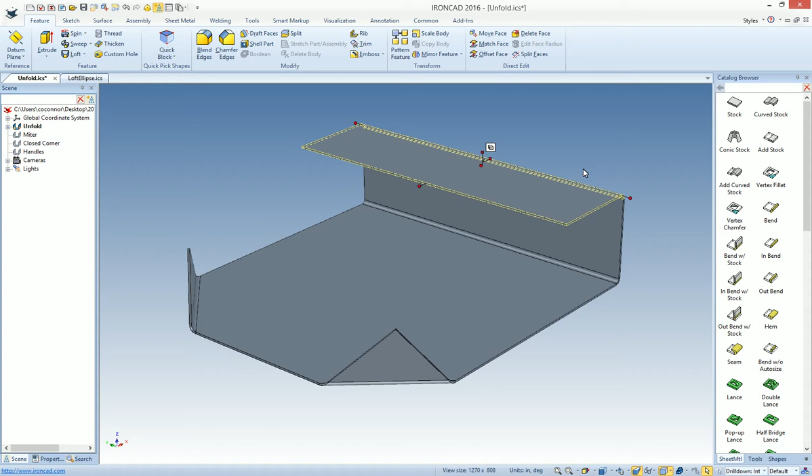This is really what's required us to use things like the cut sheet metal operation. For example, if you wanted to cut this guy, you would typically drop a block out here as a part or some shape, draw your shape, and use the cut sheet metal operation to basically cut that, and it would go through and handle this by feature unfold to give you a result. You couldn't just simply drop a cutout on this guy and expect it to unfold. It would always fail and not give you a result - it would either give you this whole solid piece back on the flat, or fail to unfold.

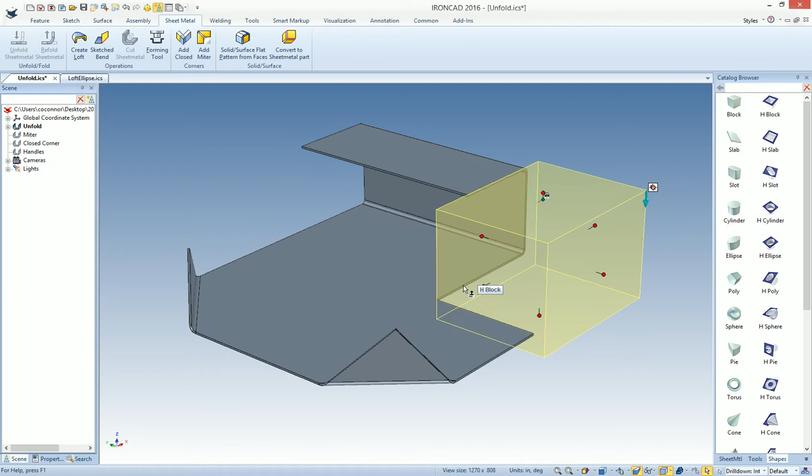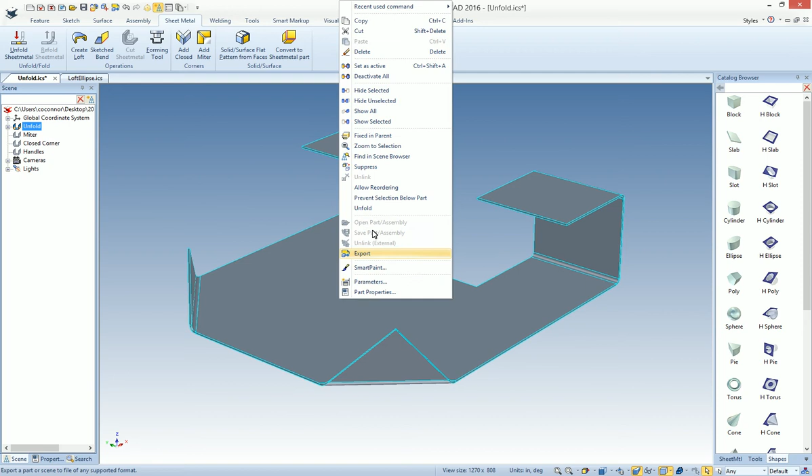It couldn't handle it. We've improved this capability in 2016 PU1 to support a lot of these conditions, and this gives us a whole range of new capabilities. For example, if we wanted to do that same operation - cut through all of this in one shot with just a regular H block inside here - I can now go in and unfold that with our regular unfold command, and it properly handles that. So that's a very, very cool feature.

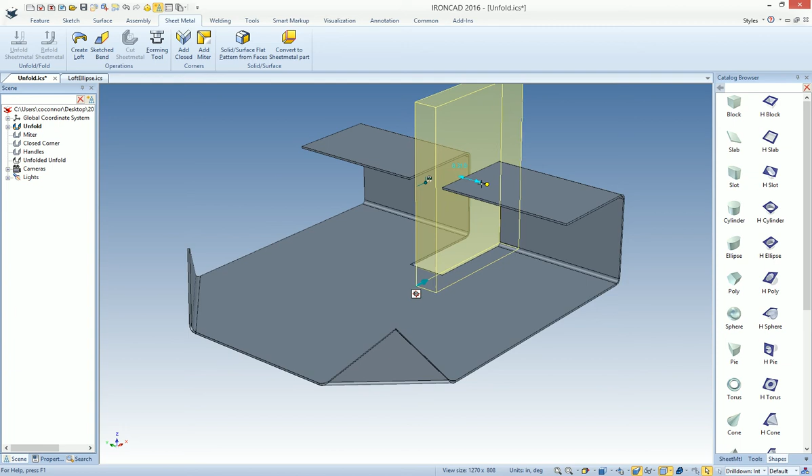It really opens the doors for things like, if you wanted to make this smaller - let me grab that guy and make it a little bit smaller inside here, something like that, and bring it down. You see people make these little support cuts, patterns along here. If you wanted to use the pattern tool, you couldn't really do that before.

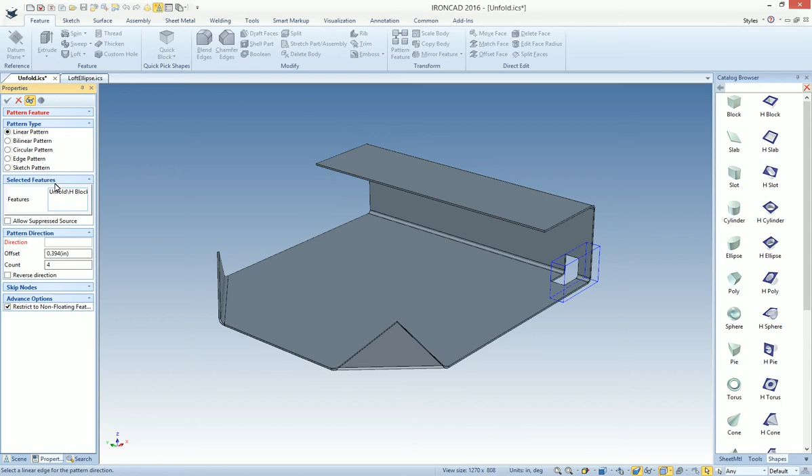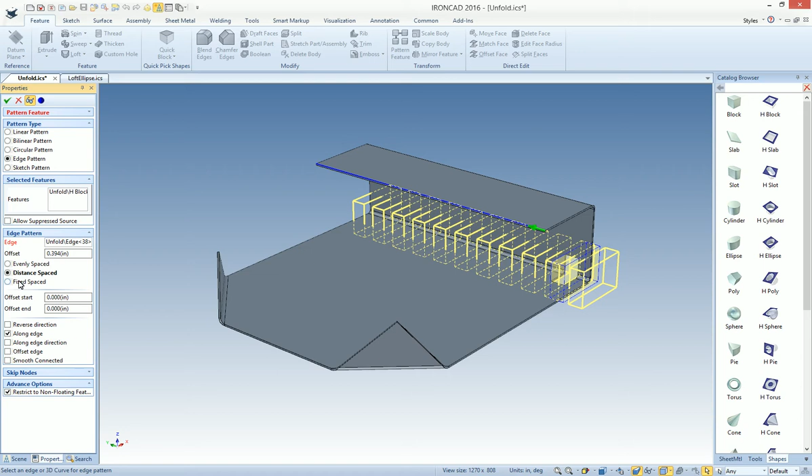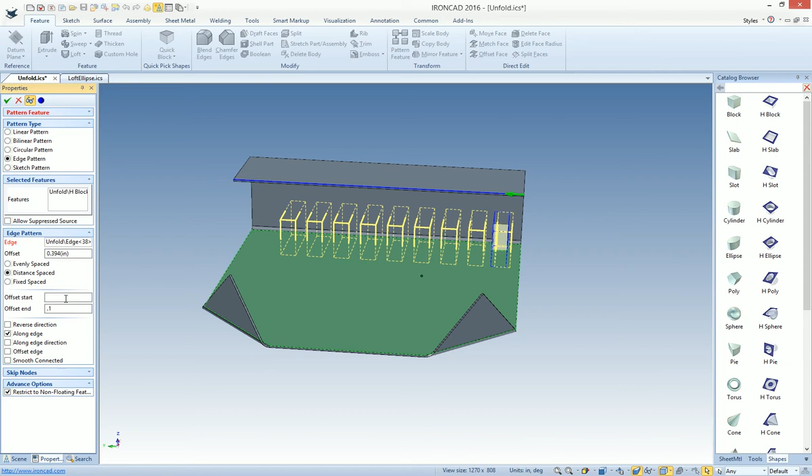Let's see if we can go in here to do a pattern feature. We select our feature, and since we don't have that edge there, we'll just use this edge as our reference. We want to create a linear pattern inside here, or an edge pattern - we can create this edge pattern evenly spaced across that guy, and it goes across the entire edge. We can offset the beginning, maybe 0.25, which gives us a better offset there on the front. And on the end, we'll offset it too - don't need that big of an offset on the end, there we go - evenly spaced along the edge.

Hit OK, now we have that shape inside here. I think I have one pattern over - I should hit that original pattern, but that's okay. Anyways, that gives you the result, but now you can actually unfold that, and it can handle this. Before, it wouldn't handle those types of pattern shapes inside here.

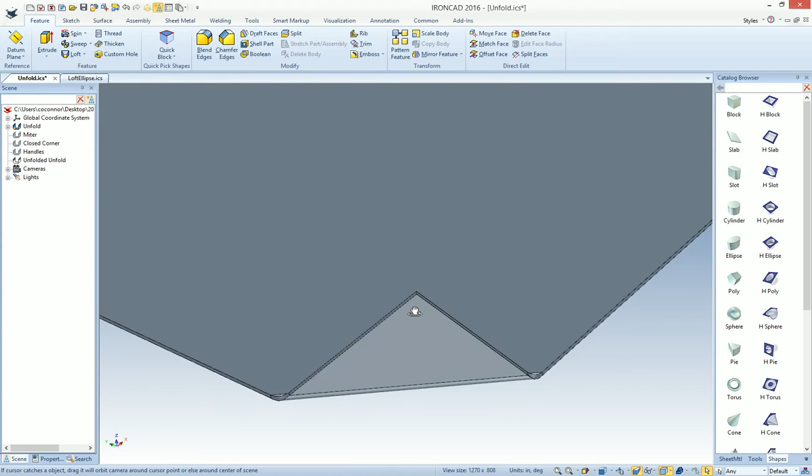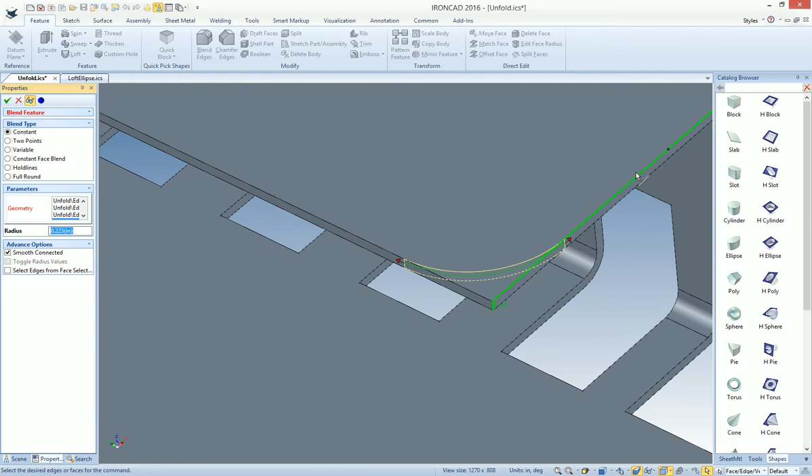This also opens up the doors for a lot of other commands. For example, people always wanted to add blends to these particular edges here - you can now support this capability as well. This is actually a sketched bend in here, and we can add it to these bends up here. You couldn't really add a blend to this edge before, but you can add blends to these edges now, and it'll make sense for it to unfold inside here, so you have that type of blending capability.

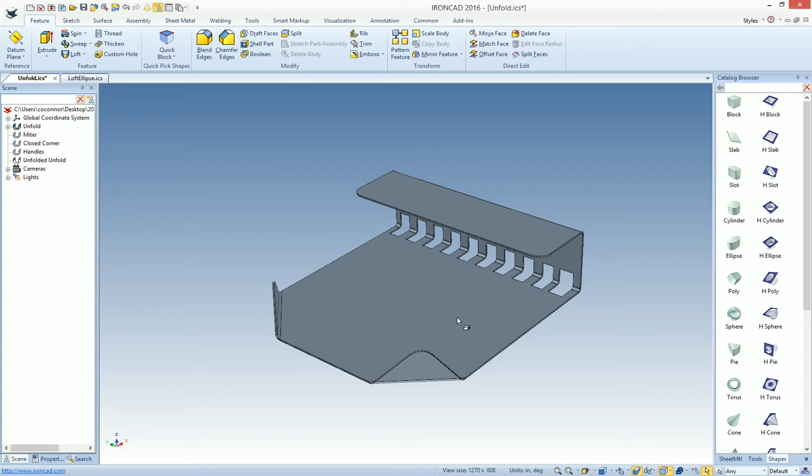We can go unfold it, and it'll handle those - notice the blends will continue to process down. Previously they would fail, giving you an error message saying these blend features can't unfold, but now it is handled. It also opens you up for the command we used to have in 2014, but blocked in 2015 and 16 - the trim command - because it had to use our cut sheet metal operation to unfold.

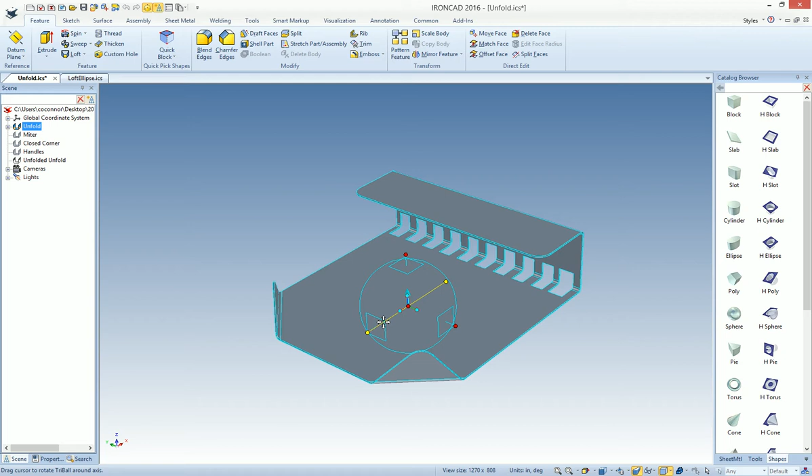But now, since we have this new unfolding capability, we can go in and actually use things like sheet metal to sheet metal, or any particular part. For example, I'll just create a new part here and copy it there for now. Take this part, move it over here - I'm using this just as a reference object, if you will - so we'll place it out here like this.

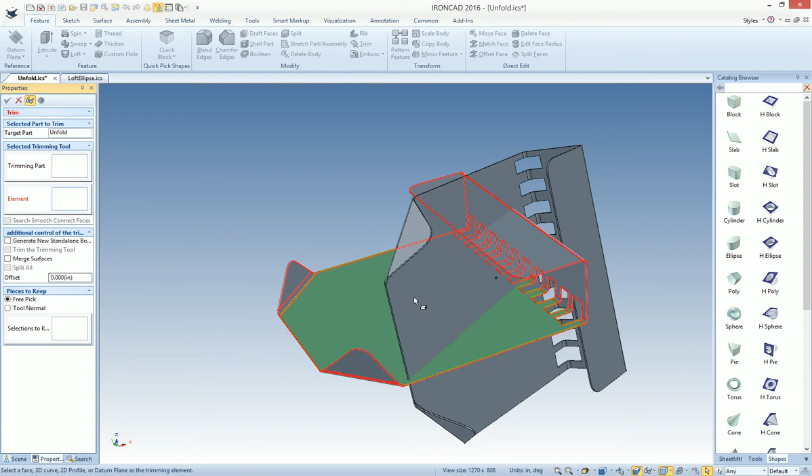Say we want to cut something like that. We can use the trim command, select our sheet metal part, use this reference face, and say we want to keep this piece over here and trim it out. We can hide or suppress or do whatever we want with that piece - that's our ending result of our sheet metal.

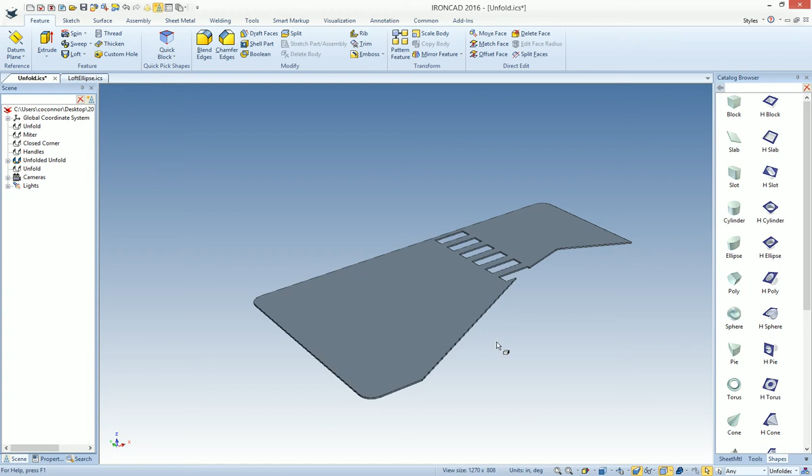Kind of funky looking, but anyways, we can now go and unfold that - no problems, and it handles that. So a very big improvement on the unfold for sheet metal. And notice it is also much faster - previously you would have to calculate a lot of things to unfold, but it is now a much faster unfolding operation. So a very cool enhancement in that regard.

Another cool enhancement in sheet metal is the miter and closed corner capabilities. These have both been enhanced to support a couple things. Let's start with the miter command. It has been enhanced to support not only your regular bends—in this example I'm just doing regular bends—but it will also support...

...in bend and out bend capabilities. In the past, when you create an in bend or out bend, it actually cuts material from your stock or adds material to it, mainly cutting material and using a second leg of stock. This has been enhanced so it now handles that and accounts for those types of bends. Much improved enhancement there.

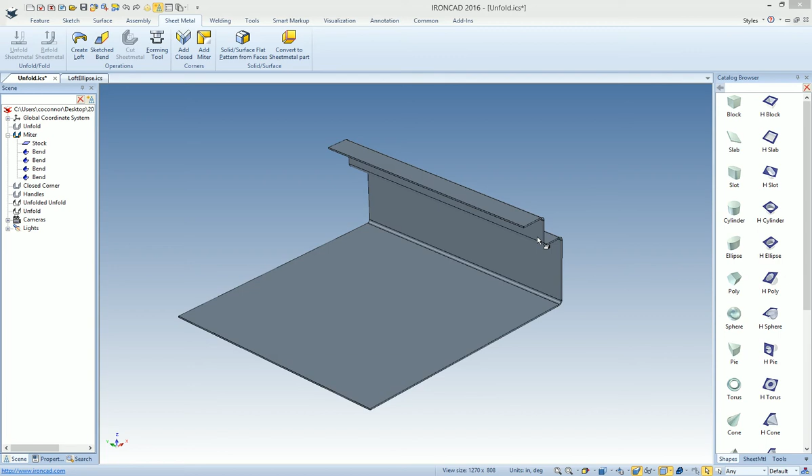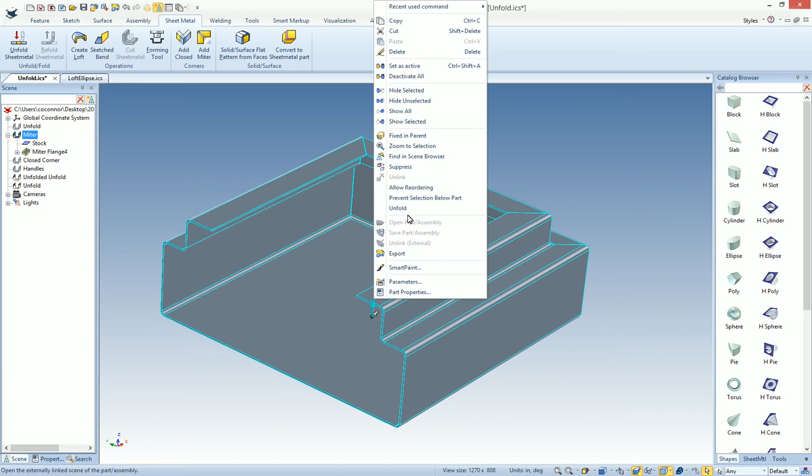The main enhancement to the miter tool itself is that the UI has changed a little bit in the dialogue. You basically select your bend segments—here I select our 3 bend segments—and then you have your straight edges. I can pick the face, or just pick 2 edges, whatever I want to do, and tell it to go ahead and miter that. You get your miter operation occurring, and you always get your unfold capabilities just like in the past. It's much faster now to unfold, but it works really well.

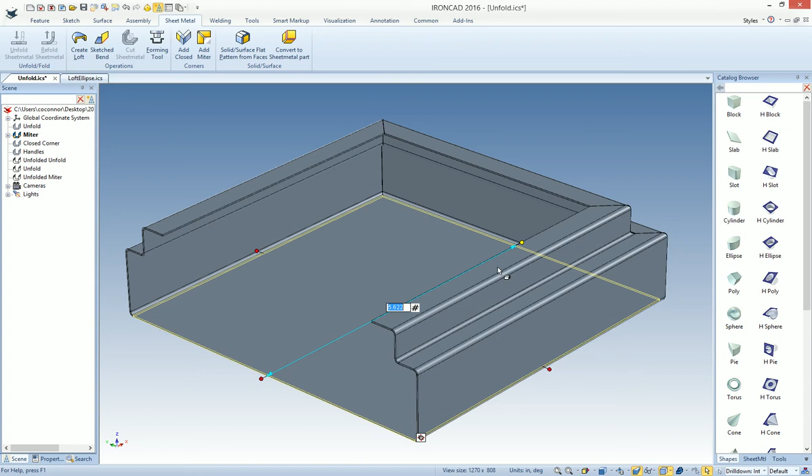The big enhancement is if you're using auto association on the sheet metal down here. If you make sure you're using the auto associate entity, the miter tool will take care of all your updates or edits. So this is our original stock—I can adjust our stock and notice all of our miter updates. In the past, you'd have to basically redo all this, delete it, start again, and rebuild that miter condition. This allows it to update.

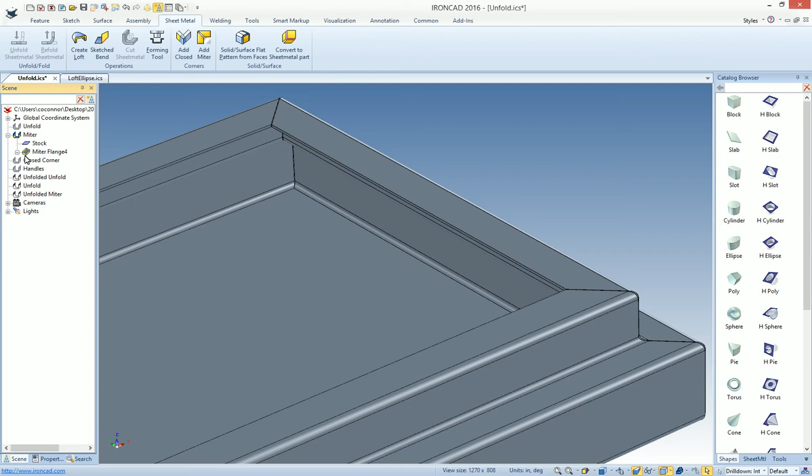You can also go into the actual miter feature created inside here and access your bend. If we wanted to change our bend slightly, you can see it will change and update, or any one of our stocks. For example, maybe we wanted to change the angle of our top bend—we can access this top bend, change its angle a little bit, and you'll see the miter will update and handle all those conditions. Very nice feature, giving you a lot of cool capabilities to enhance your sheet metal, especially with the miter conditions.

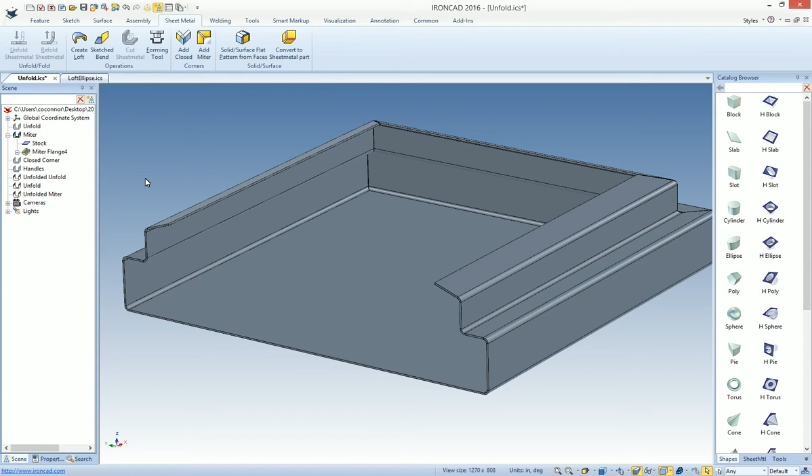Another key thing with the miter capability—let me create another condition to show this. I'll hide this one for now and create another quick sheet metal here. The one other advantage with the miter improvements is, say you have a bend like this inside here, and you have another bend over here.

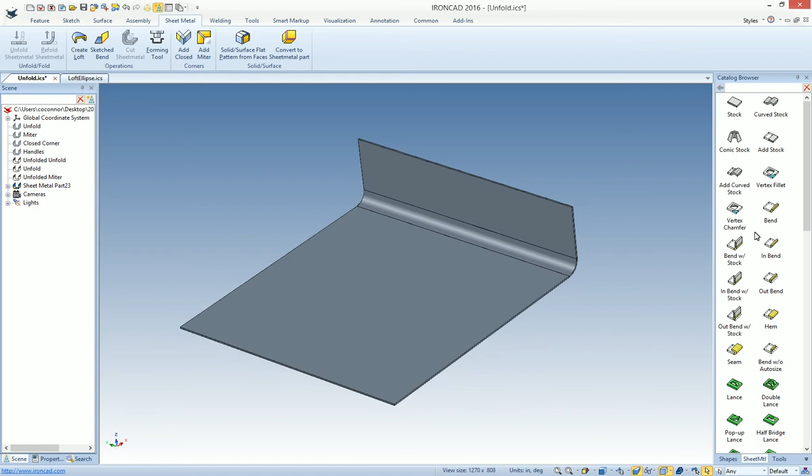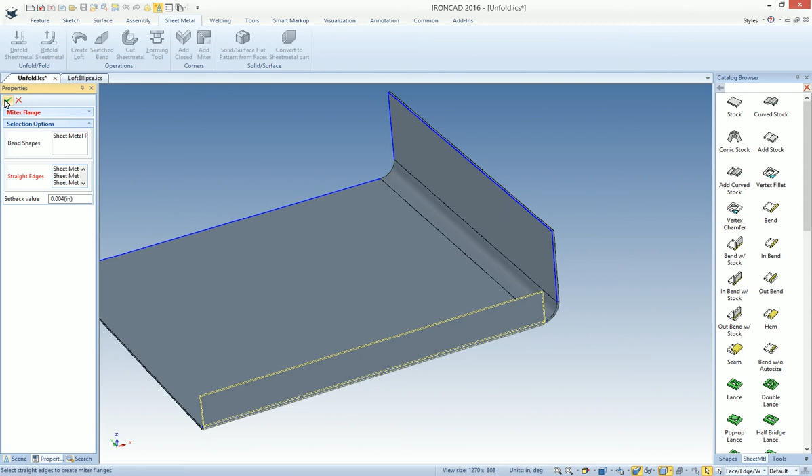Previously with miters, you would take this bend and miter on the edges, but now you can do a more advanced mitering capability. When you select this bend, you can actually pick these curved elements as well, or just go across them if you want. We'll pick our segments this way—it'll actually go across that edge there. If we pick that and go ahead, you'll see what I mean: it actually went across those bend segments and handled the miter conditions on all those corners and edges.

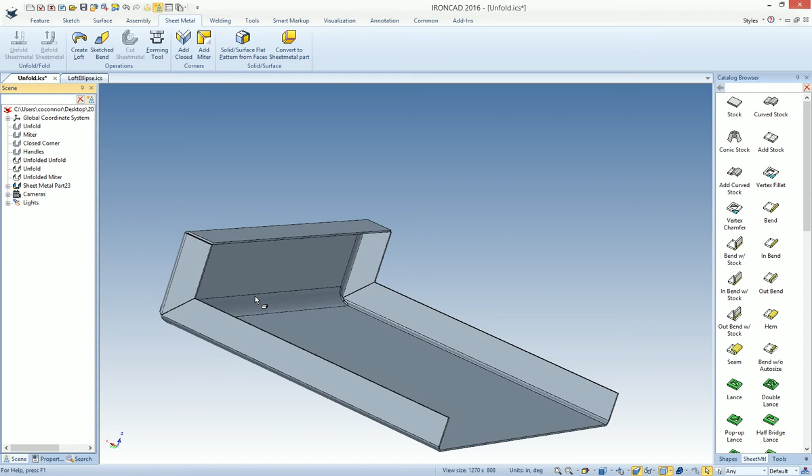It even handles this condition very well—it'll leave this area open for you and miter these corners to give you a result as if you're creating a closed box condition. Very cool enhancement to the miter; this is what's referred to as a miter across the bend. Again, that will unfold and give you the proper layouts or results for those conditions.

Very cool enhancement. Let me go ahead and hide that one. Your closed corners give you kind of the same results. If we go ahead and show this example, we can start with one condition here. So the closed corner handles the same behavior.

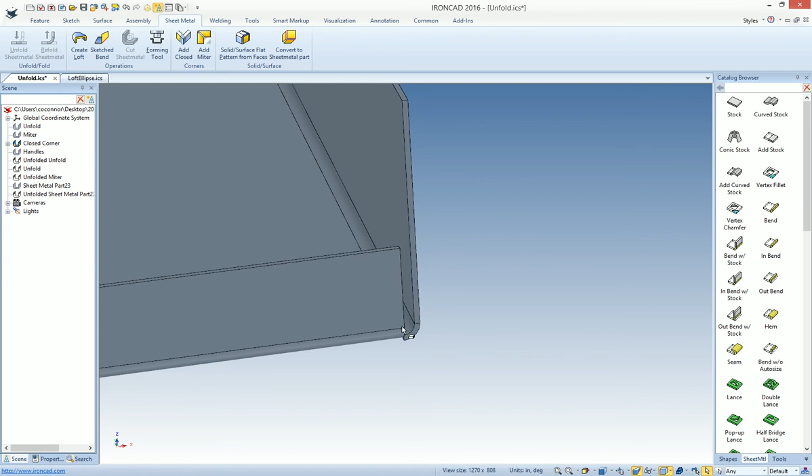If we create 2 bends—this is a regular bend here, and we have an in bend, I believe, or an out bend here, doesn't matter—it's kind of cutting into the geometry. The closed corner command can decipher those and handle them. Previous versions, let me turn that off for now—previous versions you would actually create a big block or something that hangs over here or gives you some sort of incorrect result. It is now handled properly.

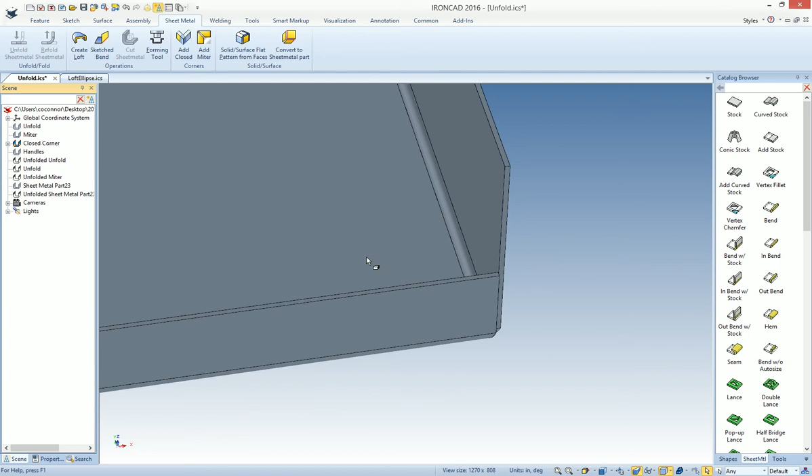Again, this all still works with the auto-associate, so if you make changes to this, it will handle those conditions for you, which is quite nice.

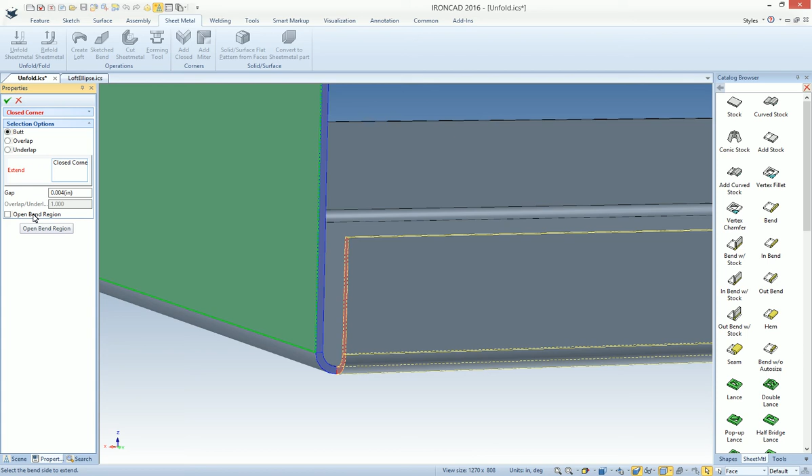The other option that I turned off when I first did this, I'll show you in this example. Basically, when you do a closed corner, there is another option that's added here, which is this open bend region. If we go ahead and do our closed corner, you see it actually creates this closed corner piece here. You can actually change that behavior if you want.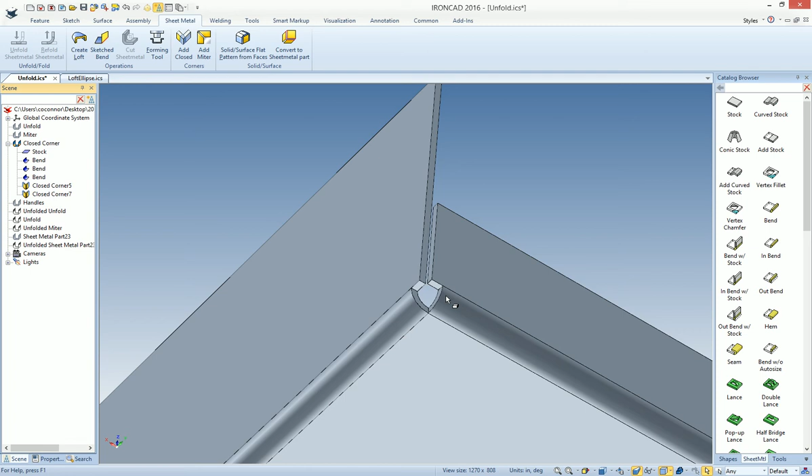If we do the closed corner, pick that element and say open bend region, what it will do is actually close the stock elements, keep this bend area open. People want that in some cases, and it comes in handy when you get more complex cases, maybe especially when one bend's bigger than the other. You may want to leave those open because the closed corner can look kind of weird if you don't. So that's a nice little enhancement for that option.

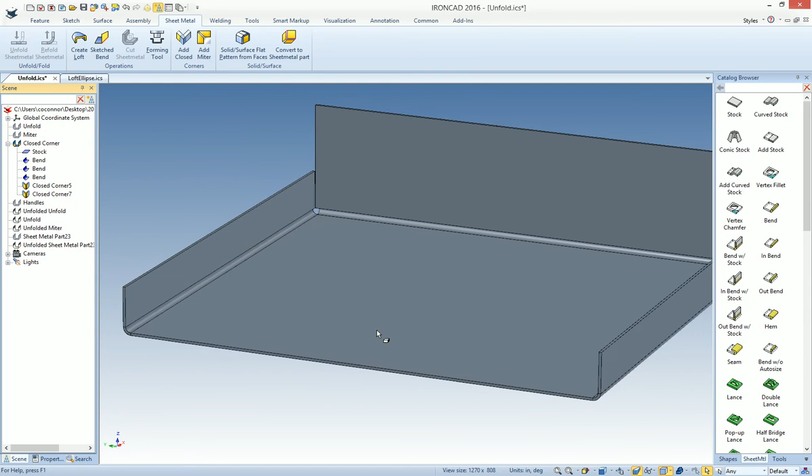Some other things that's been done with the sheet metal as well. Let me go ahead and hide this one, and I'll open this one. What we have in this case, wanted to show some other things for the sheet metal.

In the past the sheet metal does kind of handle overlapping conditions, but you don't really know that they exist. For example, if I add this bend on this edge up here, you'll notice this bend is overlapping. In 2016 PU1, we've added the ability to draw these edges. Before, this would be a merged face. You wouldn't see this, you would see one complete face here, and you wouldn't even know that's overlapping.

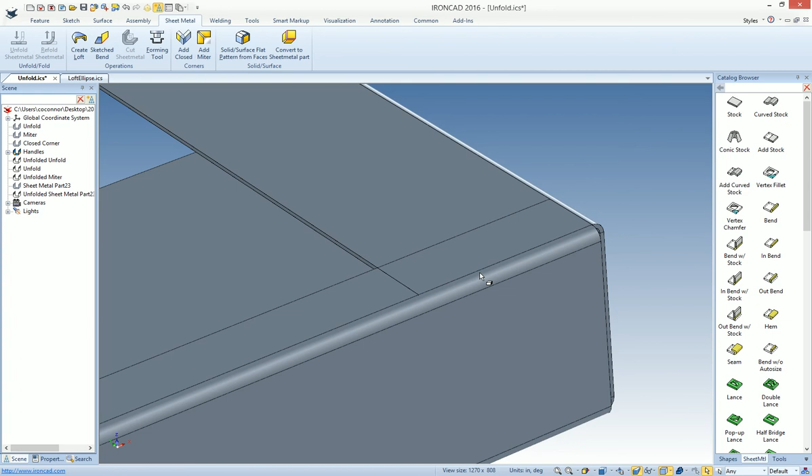You also notice that on our bends here, these edges are showing up on all the bends. Just makes it a little bit easier to see from a visibility standpoint, but you can also see that you have overlaps. This condition is still handled if you build it in order, and it'll unfold properly, but it's just a good indicator to tell people that that's going to happen, and you want to know those things before you try to manufacture something like that.

However, some people use our sheet metal for other things like building corrugated boxes and things like that. It's a good idea to know that those cases happen, but it will be overlapped in the real world for them.

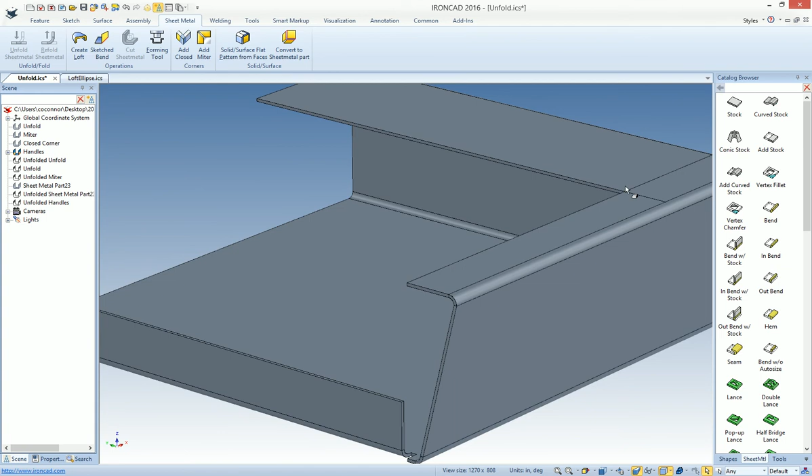Other things that have been added, you can see some handle indicators here to help give you an idea which handles are what. Inside of this, it's more apparent when you're on the feature level. You can tell that these are your angle handles now. They were just kind of floating in space before. We also added some new handles as well inside of here. We had some in the past.

You could actually switch the side of these things and say, well, you want this inside edge of this angle here. You could go and say parallel to edge, do this type of alignment inside of there to align your bends for that. But you'll also notice when I right-clicked on that, it actually gave a whole lot more. Before we only had edit angle, switch side, and parallel to edge.

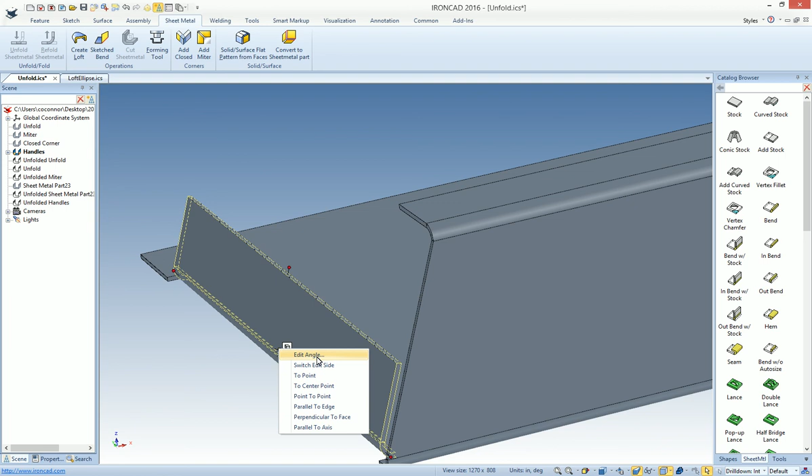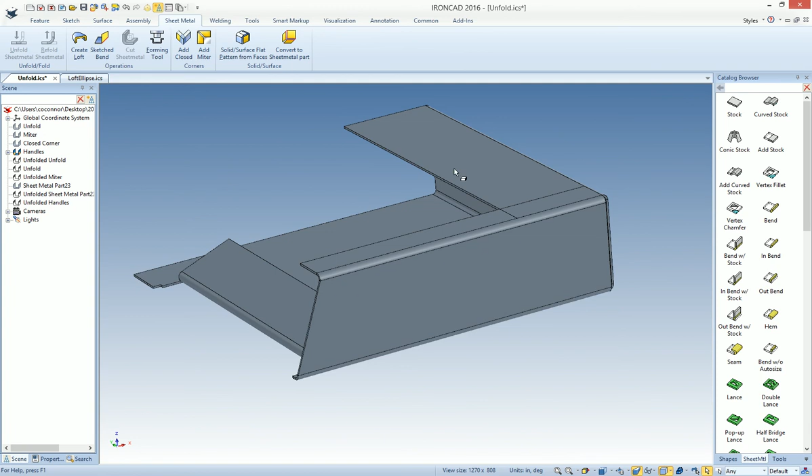We've now added all the other options to where you could go in and say, to point. I could take that to point capability and align to that point, so when you pull it up, it would align to that. That's a very handy feature, especially if you are trying to build in place and you don't know what the angle is, or you don't have an actual parallel edge to point to. So that's a very cool handle to have access to, especially on the sheet metal capabilities.

So those are some very cool enhancements on sheet metal. Makes it a lot more powerful in that regard as well.

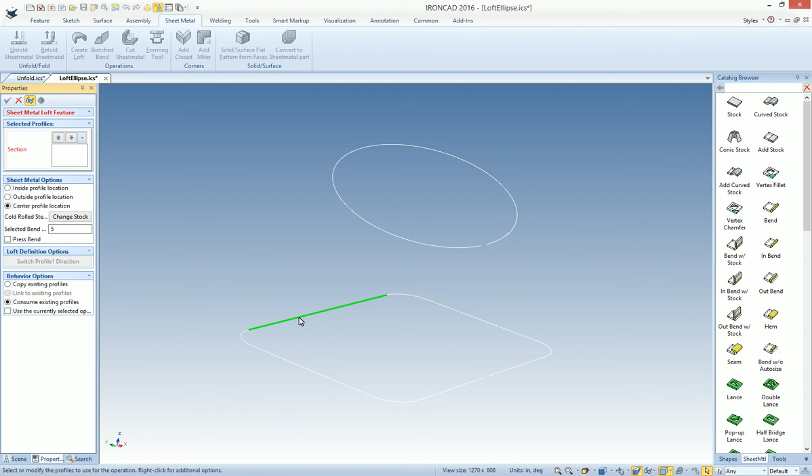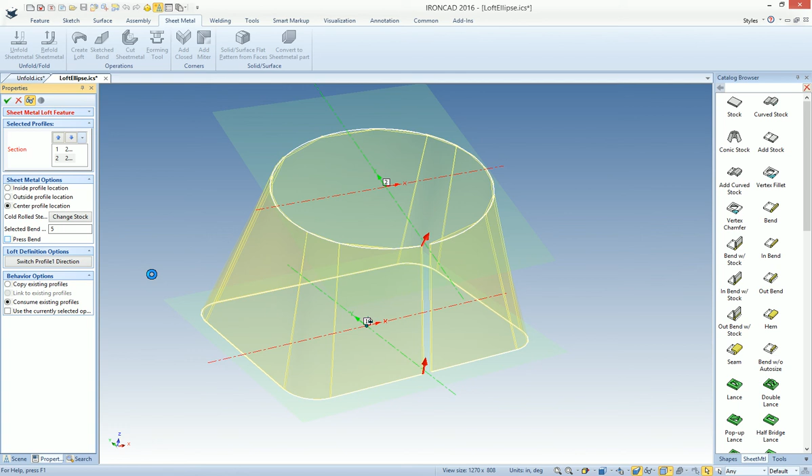I wanted to show one other thing that we did support with our lofting capability on sheet metal. If you do create a loft, we now support a square profile to an elliptical transition. This isn't actually a full physical ellipse, in this case it could be a circle that's rotated as an elliptical transition as well. Either case, both of these should be handled either as the standard lofting profile or as your press bend loft can be supported as well.

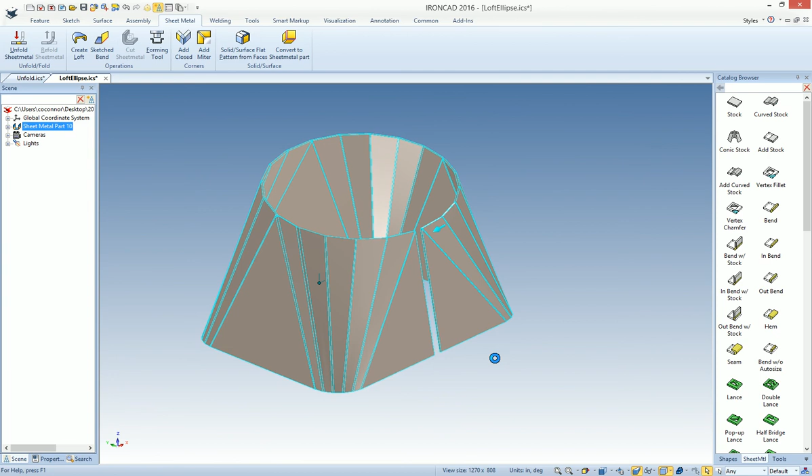If you notice, it'll create that shape, and it is a loft to square transition. It handles the gapping, gap cuts that it needs to handle in these cases. Very powerful now, and it actually will unfold as well to give you a desired result with bend lines. It's there, over there. So that's a good example of that model, a very nice capability that can be used to give some detailed lofting capabilities inside of IronCAD.

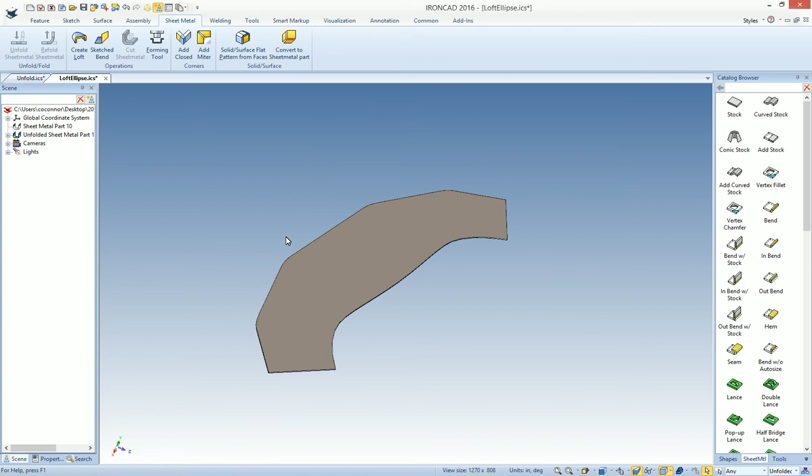So a lot of these things put together really make a powerful tool, especially with the unfolding capabilities, using the trim commands, the lofting, and the miter tools really make the sheet metal stand out in PU1. I hope everyone enjoys.